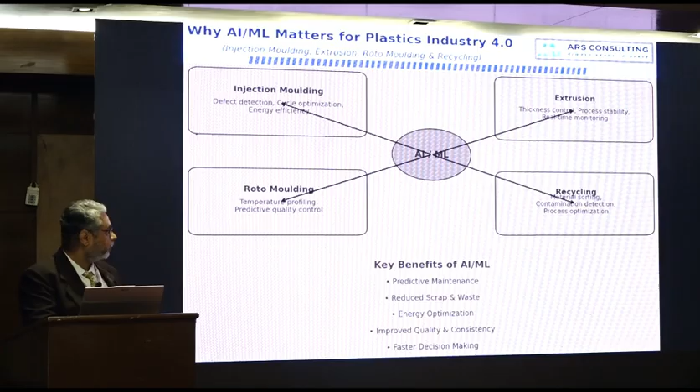Now, what are the myths?

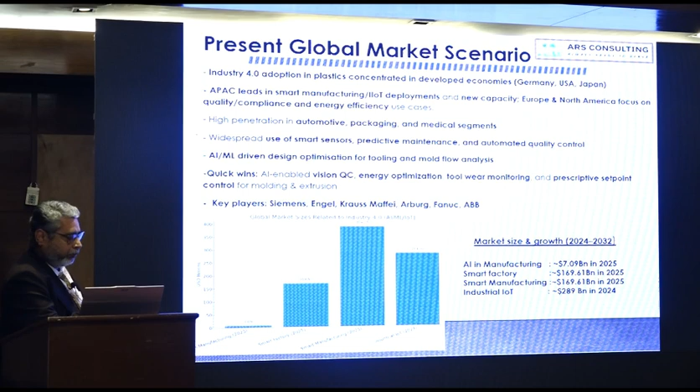Now let's look at the global scenario. If you see AI in manufacturing, it was approximately $7.09 billion in 2025, and smart factory almost 170 billion in 2025. Industrial IoT, again, is almost 290 billion in 2024. So there is a positive and, I can say, proactive growth for AI in plastic industries. Next, the present Indian market scenario. We talked about global; how does it work in India? I have got the data from valid and trustworthy sites, marketing research insights.

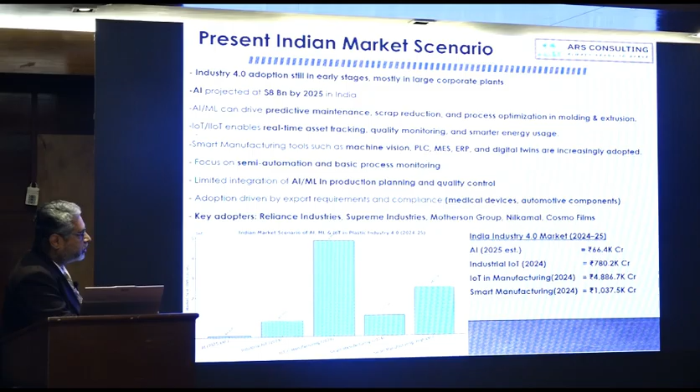The AI present potential is somewhere around 65K crore, industrial IoT is around 780K crore, IoT market potential is around 4,886K crore, and smart manufacturing is somewhere around a 1000K crore market. So venturing into this definitely involves higher capital, higher resources and all, but the market is really growing.

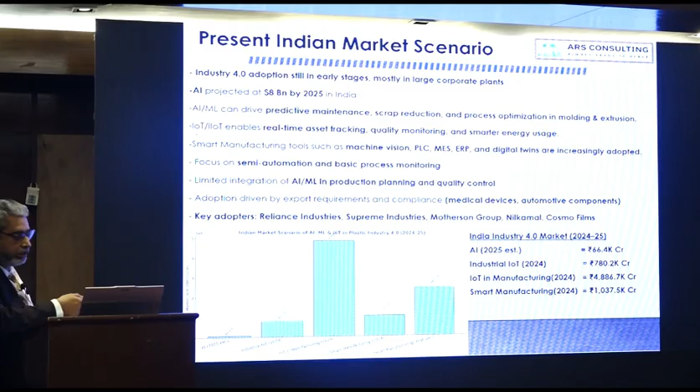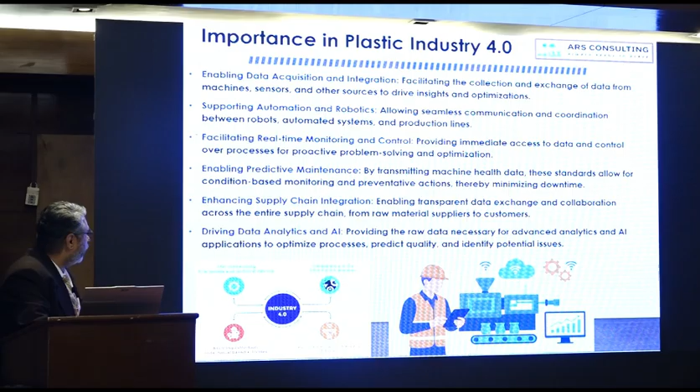Now, what is the importance? Again, enabling data acquisition and integration. Next is facilitating real-time monitoring and control. Third is enhancing supply chain integration and driving data analytics and AI.

Now, let me give a brief on how injection molding can be implemented with AI so that it really works as smart manufacturing. High data density per cycle. For example, as Sandeep sir has said, there is so much data: clamp force, melt pressure, cavity pressure, screw position. All this data can be fed in, so that we don't have to search for a manual or anything.

Next, common innovations. One is closed loop cavity, that is pressure control, and AI based quality inspection, so we don't have to visually inspect the components. Through software, we can have a closed loop system to control the quality, and remote monitoring. And before any unforeseen circumstance or upset happens in the machine, that can be handled through predictive maintenance.

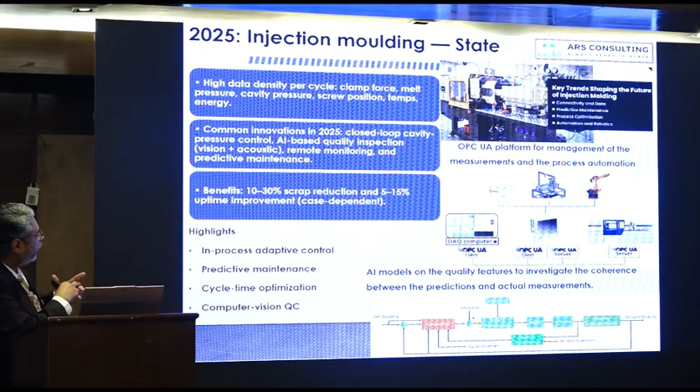What is the benefit in injection molding? I'll cite examples as well. There is 10 to 30% scrap reduction and 5 to 15% uptime improvement. Now, these are a few specific examples I have given. Hope this is visible. These are the areas where AI has been applied: the scale for measuring the weight, the dimensional measurement system, and the camera for surface quality inspection.

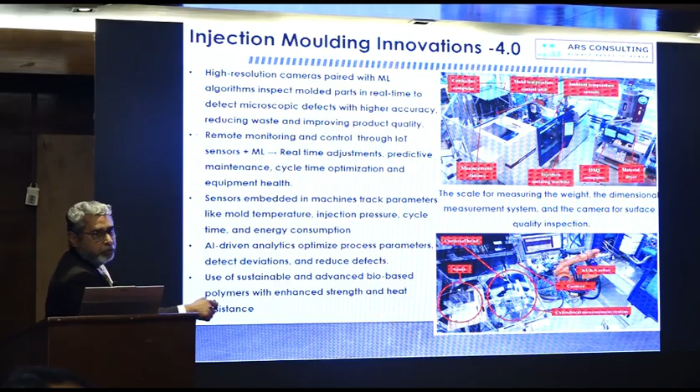If we depute a QA person for each and every activity, we need at least some 6 to 7 people to do that. But if we depute an AI ML system, it does it all together in one shot. Next, injection molding innovations. What do we mean by digital twins? Digital twins optimize and simulate the molding cycles and reduce the trial and error process.

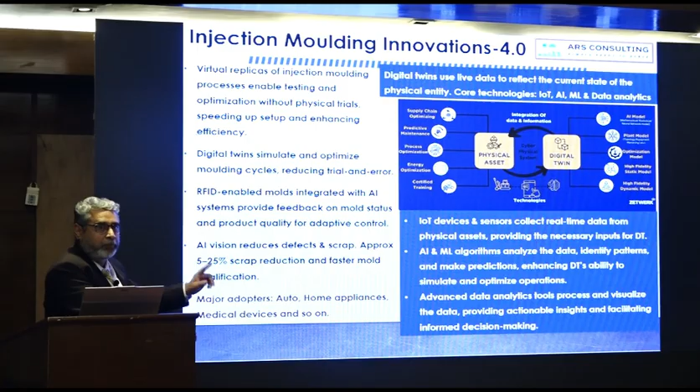Next, RFID tags can be attached to the components. Suppose 30,000 components are made which go into the assembly line, and any particular part is found to be defective, that can be retrieved through RFID tags. Through a manual batch process, it would be very difficult for us to track it.

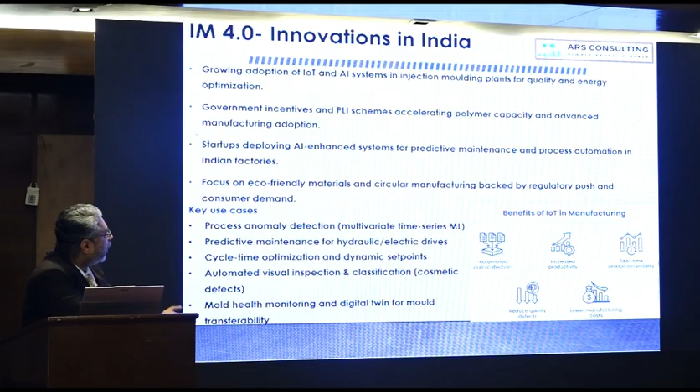Next, what are the innovations happening in India? One is growing adoption of IoT and AI systems in injection molding plants. Second is many startups. I'll give the examples and case study in the coming slides. AI enhanced systems for predictive maintenance and process automation in Indian factories.

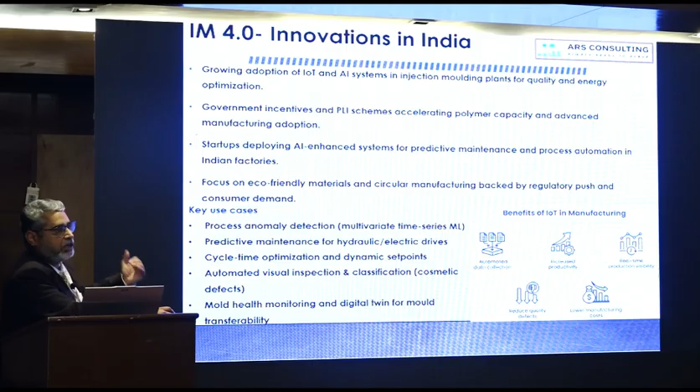What are the key use cases? One is process anomaly detection. Second is predictive maintenance. Third is automated visual inspection. Fourth is mold health. When a mold completes, say, 5 lakh shots or 10 lakh shots, that health monitoring can be done by AI ML itself. Now I would like to run a small video.

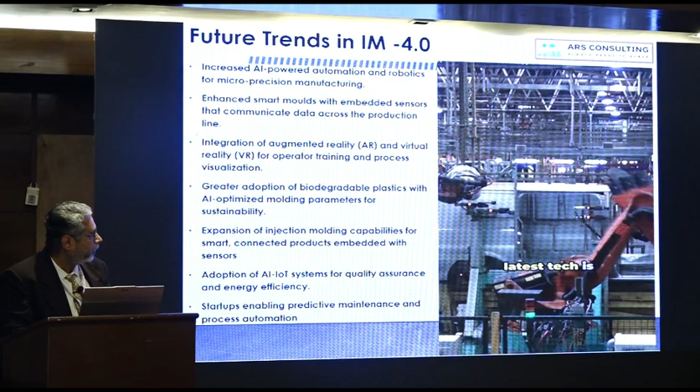Sound please. Sir, sound. Sound. Volume.

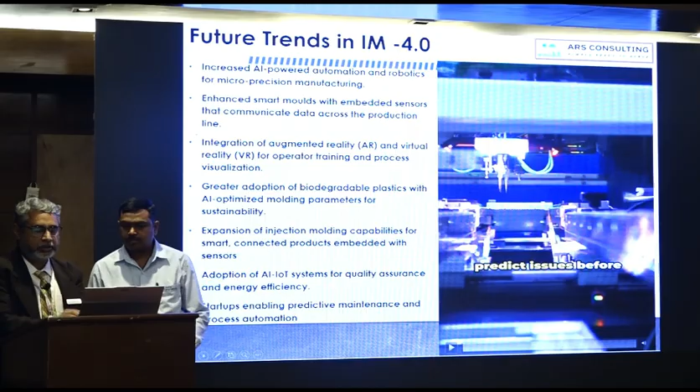Let's talk about IoT, the Internet of Things. Sensors on machines collect data and send it to the cloud. This means faster problem solving and less downtime. Next up, AI and machine learning. These technologies predict issues before they happen, making your factory more efficient and cutting costs.

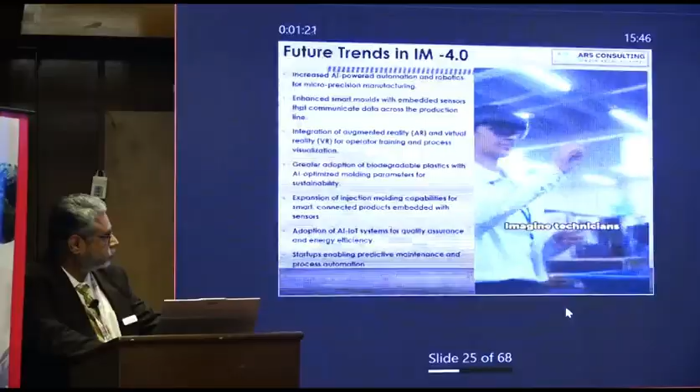And don't forget about robotics. Robots are taking over repetitive tasks, freeing up humans for more complex work. Finally, augmented reality. Imagine technicians using AR glasses to get real-time repair guidance. It's like having a tech guru by your side. Industry 4.0 isn't the future, it's now. Get on board and transform your factory today. Thanks for watching. Don't forget to like and subscribe for insights.

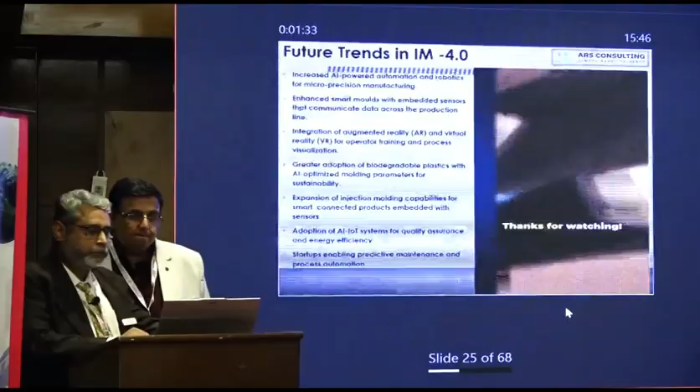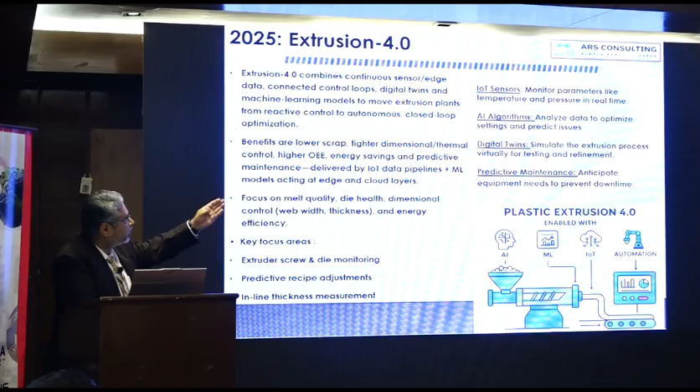I'm done with the injection. Let me go with the extrusion. Extrusion is enabled with AI, ML, IoT and automation. Here again, IoT sensors monitor parameters like temperature and pressure. Algorithms optimize the settings and predict issues. Digital twins do the testing and refinement, and predictive maintenance prevents downtime.

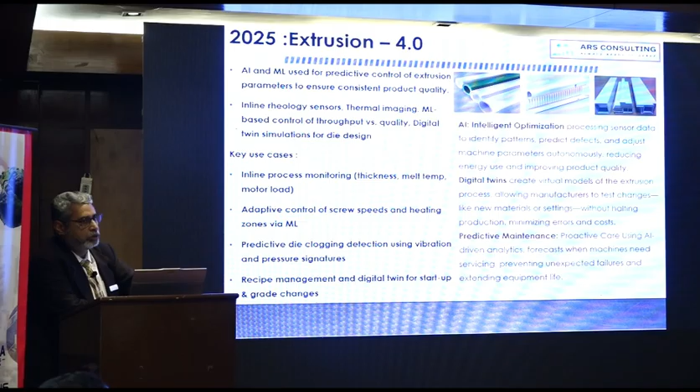I'll just cite a few examples, maybe pipe or profile or anything. This intelligent optimization processes sensor data to identify the patterns, predict defects, and adjust machine parameters. And digital twins create virtual models. Suppose you have any specific profile or specific model to be done, that can be done through digital twins. That is a modeling thing.

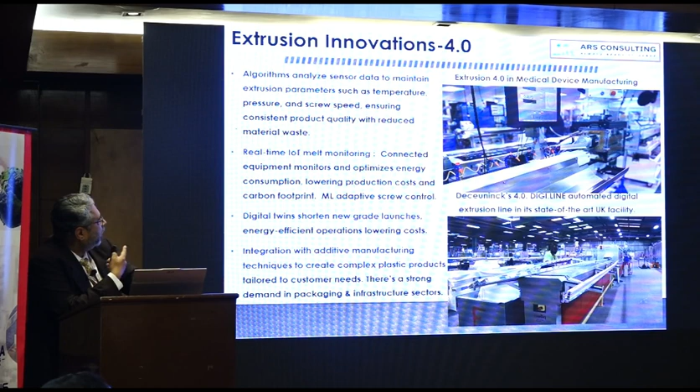What are the core components of extrusion? Whatever we have seen in injection, the same thing is available in extrusion 4.0. These are all the parameters required for implementing this 4.0. Algorithms analyze the sensor data to maintain extrusion parameters. Then real-time data from IoT. Whenever there is melt temperature monitoring or any process temperature, that is done by IoT.

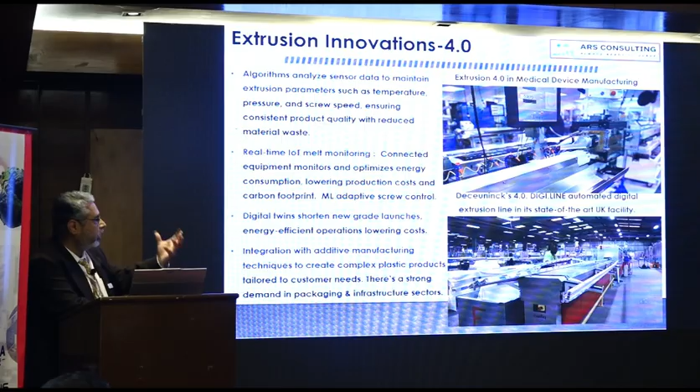And then digital twins shorten new grade launches, and integration with additive manufacturing. Say for example, you want to create a new plastic product, a new design, that additive manufacturing 3D software can be incorporated with this extruder. Next, innovation in India.

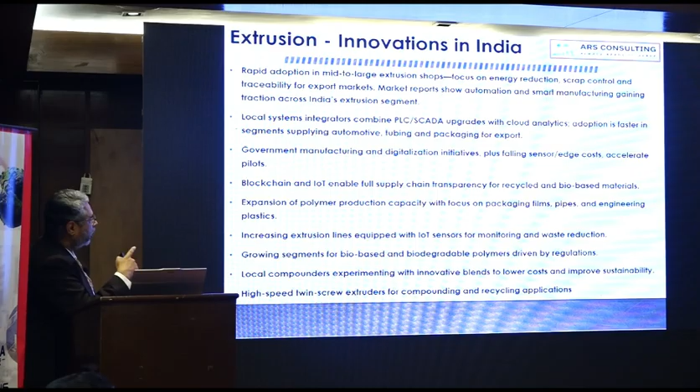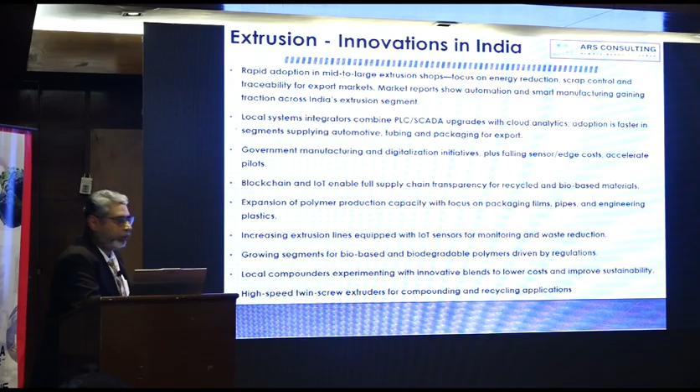The major innovations happening are: one is rapid adoption in mid to large extrusion shops, then PLC and SCADA system upgrades with cloud analytics, then government manufacturing and digitalization initiatives, plus sensor and edge cost reductions that accelerate the pilots. Then blockchain and IoT enable the entire supply chain, from incoming raw material to outgoing. The entire thing can be monitored by blockchain and IoT. And increasingly, extrusion lines are equipped with IoT sensors for monitoring and waste reduction.

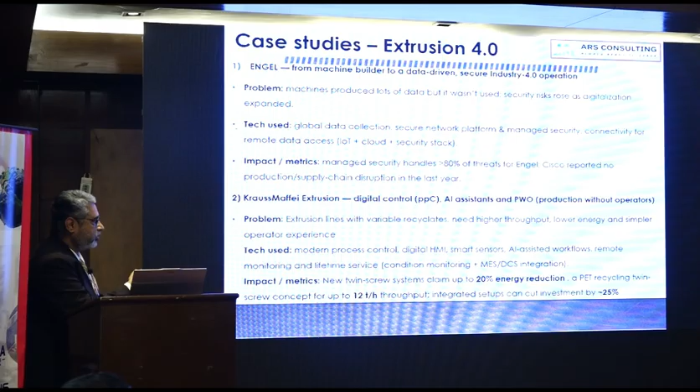Next is KraussMaffei extrusion. They exhibited at K-Fair. They had a problem of extrusion lines varying with variable recyclates, and needed higher throughput, lower energy and a simpler operator experience. They used modern process control, digital HMI and smart sensors. With that, they could implement new twin screw systems with 20% energy reduction.

Next, future trends. What are the future trends ahead in 4.0? One is North America and APAC. They have high penetration of digital twins, and larger OEMs and tier 1 suppliers are implementing AI ML. And in development of new sustainable products, especially in recycling, they are implementing AI ML.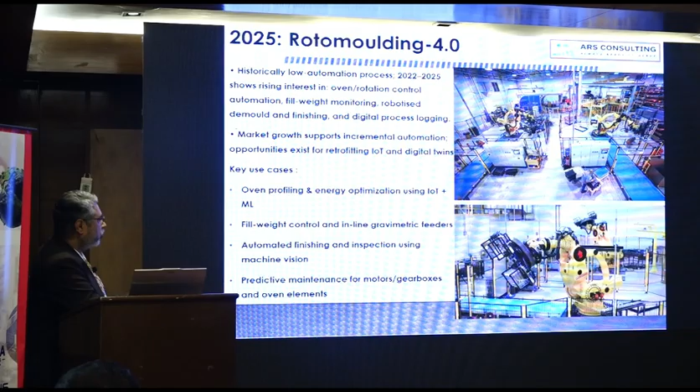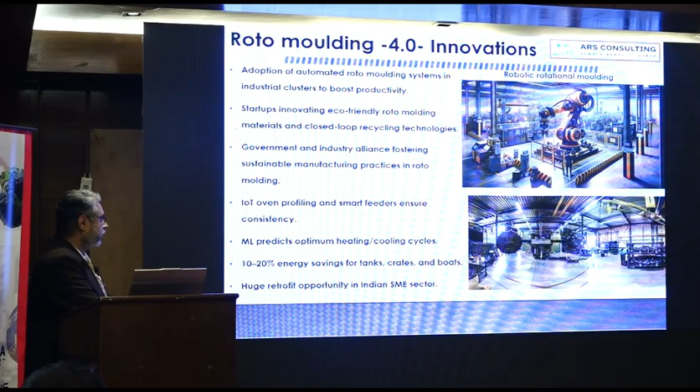A few innovations, for example, startups with eco-friendly rotomolding materials with closed loop recycling technologies, have implemented them. In Europe it has been done, in India it is yet to be done. Machine learning predicts the optimum heating and cooling cycle, and it facilitates 10 to 20% energy savings for tanks, crates and boats applications. The most important thing is, it's a huge retrofit opportunity in the Indian SME sector.

Next, rotomolding innovation may be Rotoline variants like shuttle, carousel, rock and roll, sphere oven. They have shown some challenges.

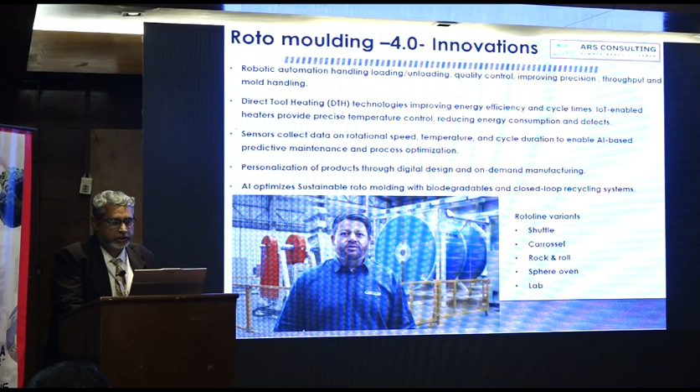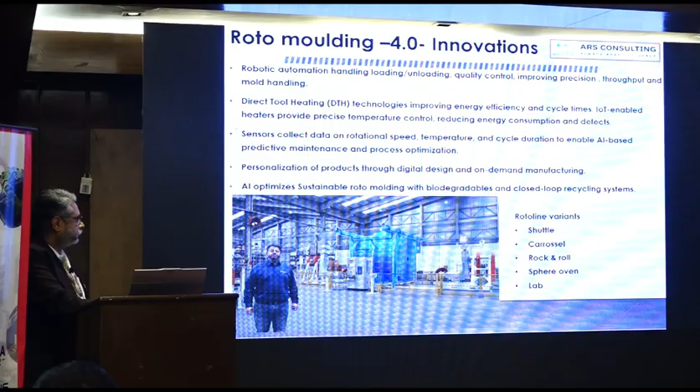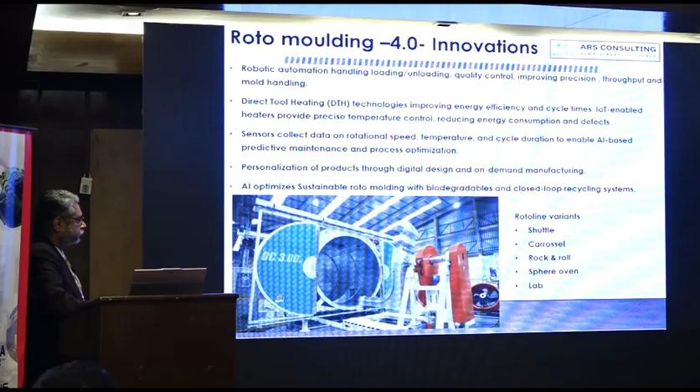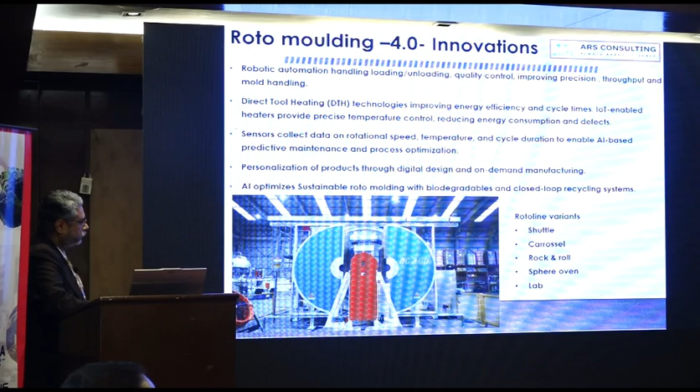Welcome to Roto Line. Today I want to show you the Roto Line shuttle machine. Shuttle machines are capable to produce any part in polyethylene. The machine is divided in three main parts, a central oven and two carts. It's this setup and an independent recipe for each cart that allows the efficiency in production of many parts. The shuttle machine is the best option to manufacture parts of different shapes. The shuttle machine has a cylindrical oven to guarantee an efficient airflow throughout the process. Also, the oven structure is sealed to prevent heat loss, resulting in a gas consumption economy.

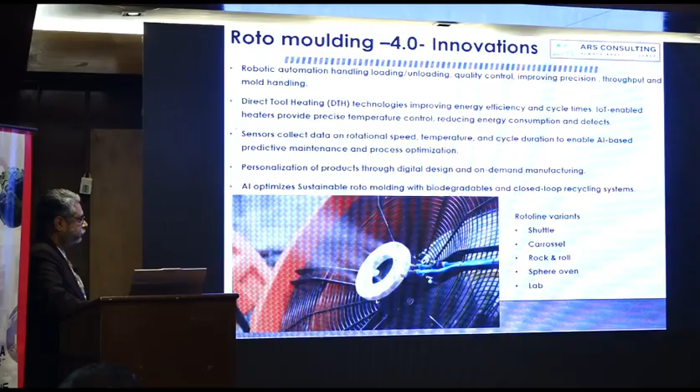The standard machine is equipped with straight arms and can be replaced for an offset L or offset C. The arm speed can be programmed on the recipe screen. Also, you can program temperature, oven time, and reverse rotation. The machine has cooling fans on each station. The air assist cooling developed by Roto Line has a continuous water and airflow, preventing water accumulation in front of the fans, speeding up the cooling process. The equipment goes through a strict manufacturing, quality, and testing control. The installation is always supervised by a Roto Line technician. Fast and efficient technical assistance in three languages: English, Portuguese, and Spanish. Panel connections are made with quick disconnect plugs, reducing machine installation time.

To facilitate the operator's routine, the interface includes a computer with a navigation system that is easy to operate using a mouse and keyboard. The software can display many informations as fault log, diagnosis, product information, PLC inputs and outputs, among others. Now you know a little bit more about the shuttle rotational molding machine. Come and visit us. Welcome to Roto Line. Today I want to show.

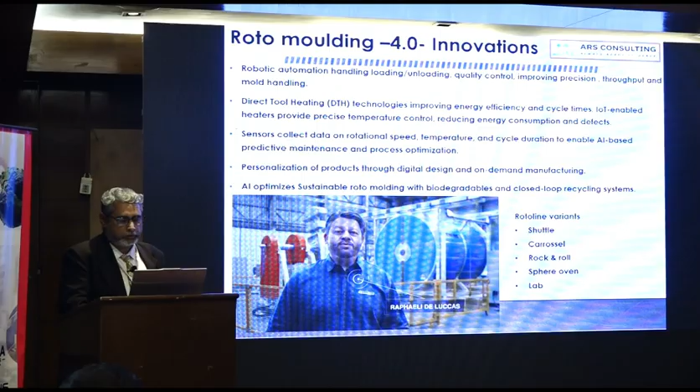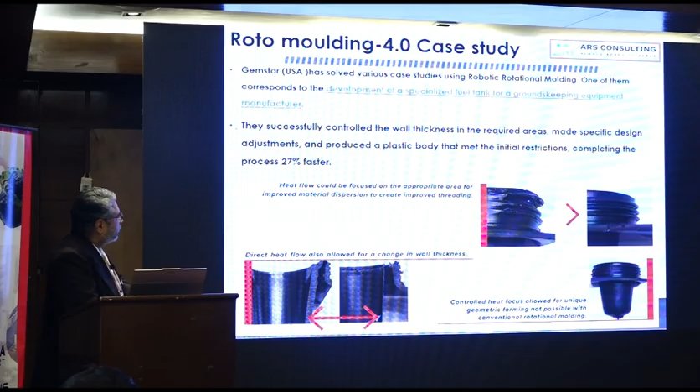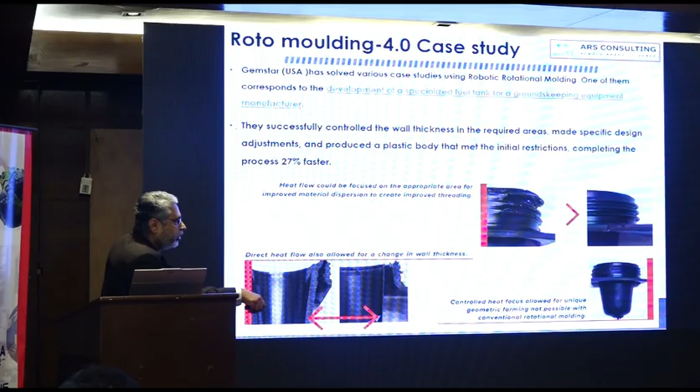Next, rotomolding case study. Let's see a specific case study: development of a specialized fuel tank for a groundskeeping equipment manufacturer. There was an issue in heat flow, which could be focused on the appropriate area for improved material dispersion and to create improved threading. There was also an issue in the direct heat flow, which also allowed for a change in wall thickness. After implementing this, controlled heat focus allowed for unique geometric forming, which was not possible in the conventional rotomolding process.

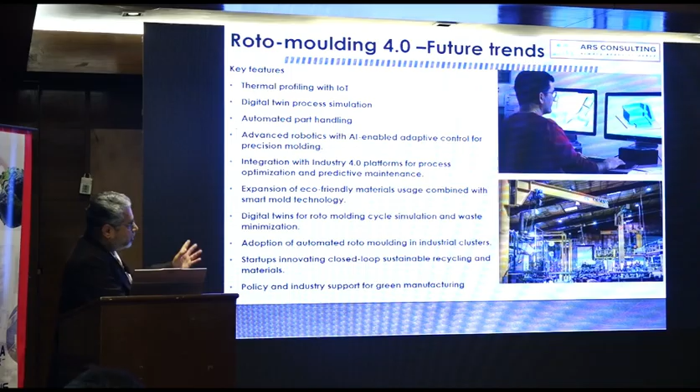Now, a few innovations which we have seen: smart sensors and Internet of Things, allowing operators to monitor performance remotely, and CNC machined molds that enable the creation of more complex designs with tight tolerances and high dimensional precision. Now, future trends. What are the future trends? One is thermal profiling with IoT, digital twin process simulation, automated part handling, and integration with Industry 4.0 platforms for process optimization, and digital twins can be deployed in the rotomolding cycle for simulation and waste minimization.

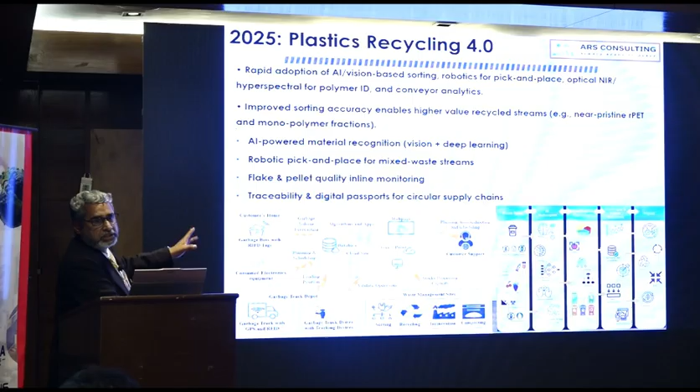Now, 2025. When we talk about the recycling industry, as I said, one process is sorting the incoming and outgoing material. Another is rapid adoption of AI and vision-based sorting, robotics for pick and place, optical NIR and hyperspectral polymer ID, and conveyor analytics. These are all the new technologies implemented in recycling industries in Europe. I'll run a small video, please.

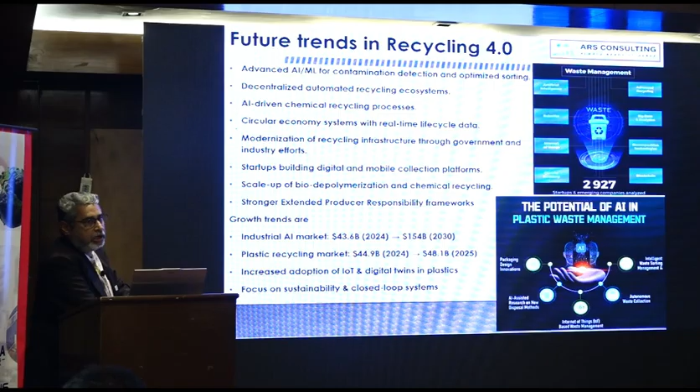Future trends of 4.0 in recycling: waste management is going to be revolutionized, scaling up biodepolymerization and chemical recycling as mentioned by the CIPET director. There AI finds a vital role.

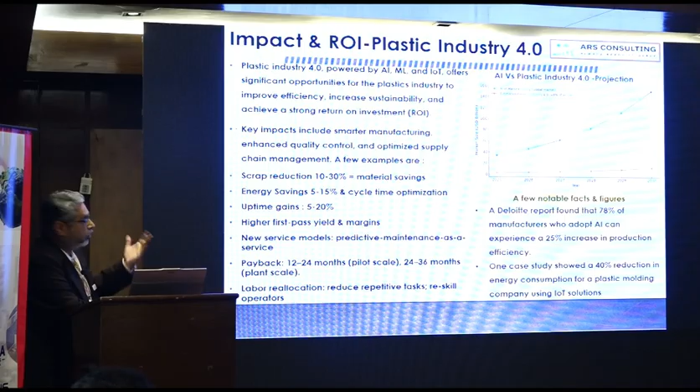Impact and return on investment for plastic Industry 4.0. We have just an analysis, AI versus plastic Industry 4.0. AI in manufacturing here, and estimated plastic industry growth here. There is a phenomenal increase in this domain, the blue one you can see. Starting from 25 to 30, the growth trajectory is very fast. It will enable scrap reduction of 10 to 30% in terms of material savings, energy savings between 5 to 15%, cycle time optimization as well, and uptime gains, not only downtime, uptime gains between 5 to 20%.

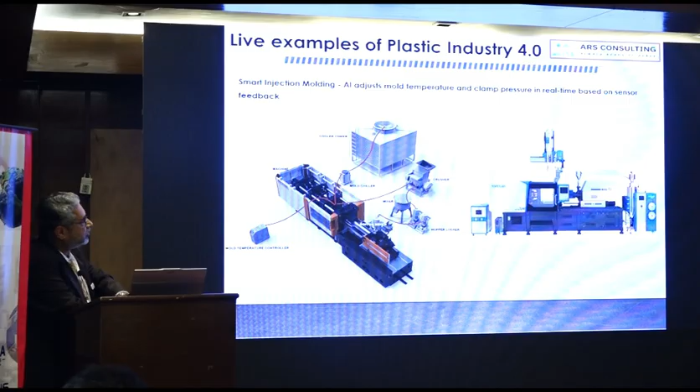These are all the major application segments where AI/ML finds a vital role, including live examples of mold change, especially mold temperature and clamp pressure.

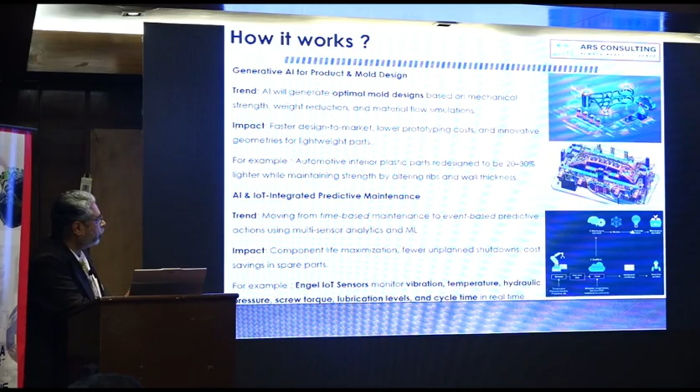How does it work? One is generative AI in product and mold design. The trend is it will give optimal mold designs based on mechanical strength and weight reduction. The impact will be faster design to market, reducing time. Instead of doing a prototype and then conceiving a full-fledged mold, it will reduce the time, and move from time-based maintenance to event-based predictive maintenance, which can be done with AI/ML.

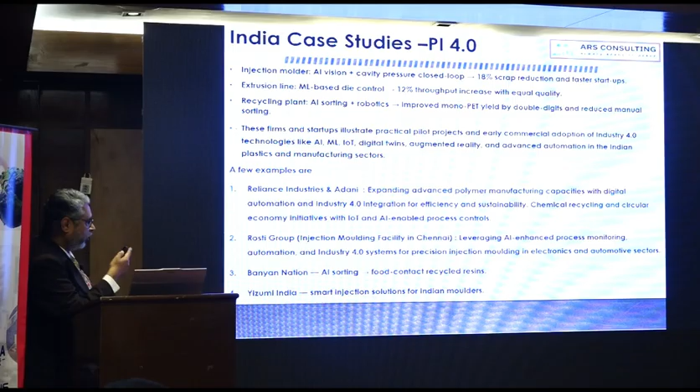They have implemented this leveraging AI-enhanced process monitoring system. Third is a Hyderabad-based company called Banyan Nation - they implemented AI sorting. Fourth is Yizumi India, a well-known company - they implemented smart injection molding solutions for Indian molders.

Next is Recykal, again a Hyderabad-based company. They introduced a digital platform for plastic waste traceability and transparency.

Next, Schneider Electric in Bangalore and Hyderabad - they have integrated energy-saving IoT and automated solutions, especially for switch gears. Then Siemens in Kalwa, Mumbai - they transformed via digital twin technology and IoT to increase their productivity and flexibility.

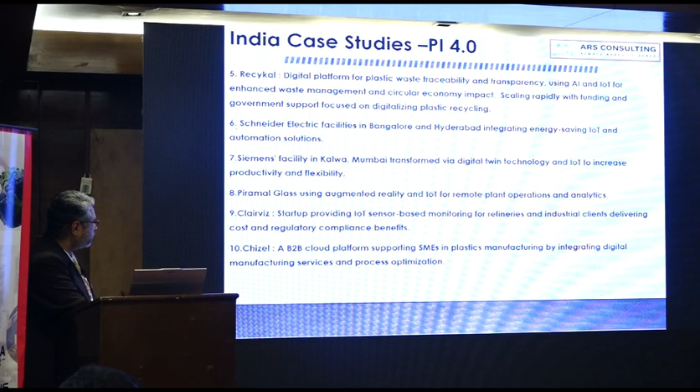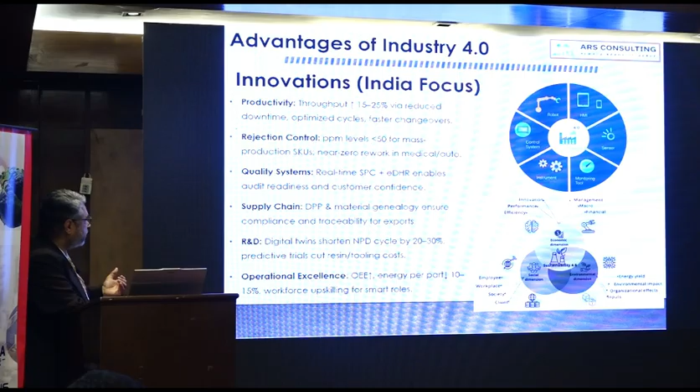What are the advantages? As we have already seen: productivity, rejection control, quality systems, supply chain, R&D efficiency, and last but not least, operational excellence.

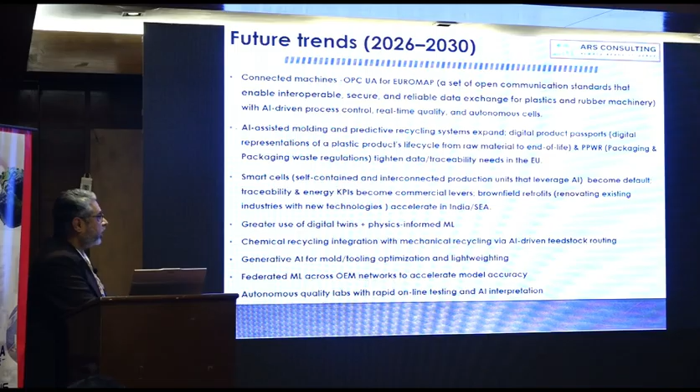What are the future trends? One is connected machines - as I explained earlier, Euromap and OPC UA have open communication standards which enable various kinds of technologies. Second is smart cells, that is self-contained interconnected production units. Third is greater use of digital twins and physics-informed ML.